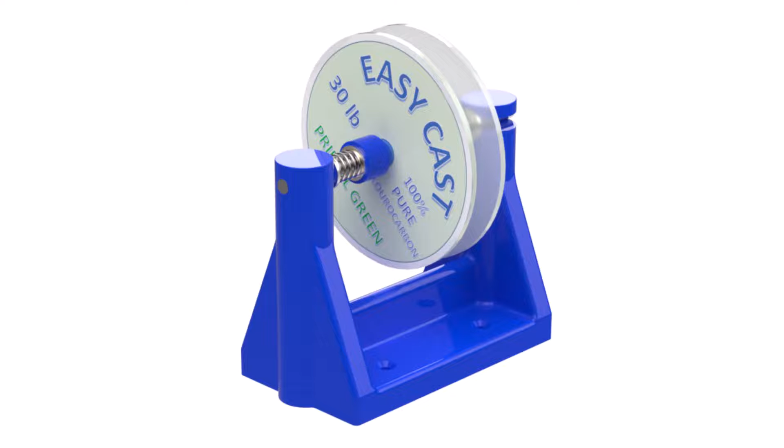This video presents a project that you can use to hone your SOLIDWORKS skills and is easy to make if you have a basic 3D printer.

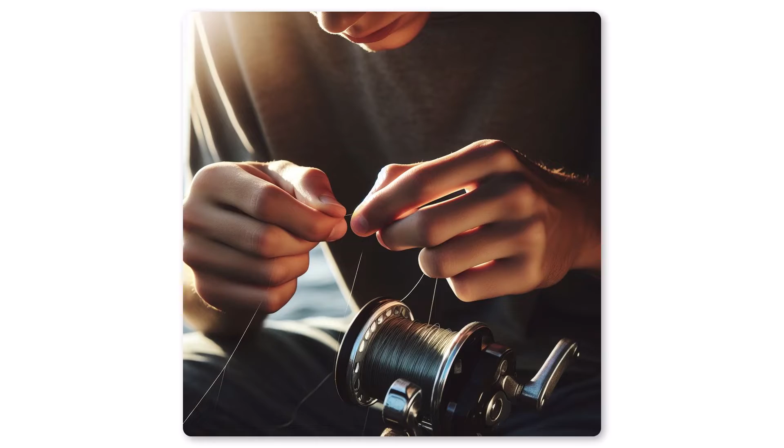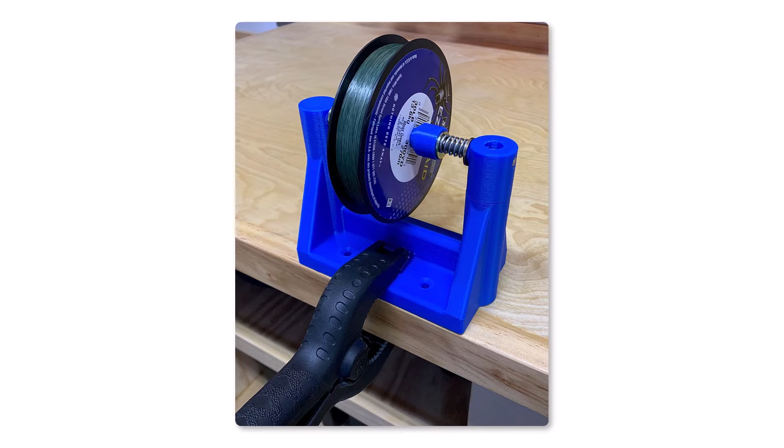I was getting ready for this spring season of fishing and needed to replace the line on my reels. Rather than asking someone to hold the new spool or propping it up with a makeshift error-prone system, it occurred to me that I needed a more reliable method to help hold the new spool. So I fired up SOLIDWORKS and came up with a handy design and printed it on my 3D printer.

The key aspects of this design that I will focus on are design intent, features, exporting solid bodies, hardware, assembly, and 3D printing. Let's get started.

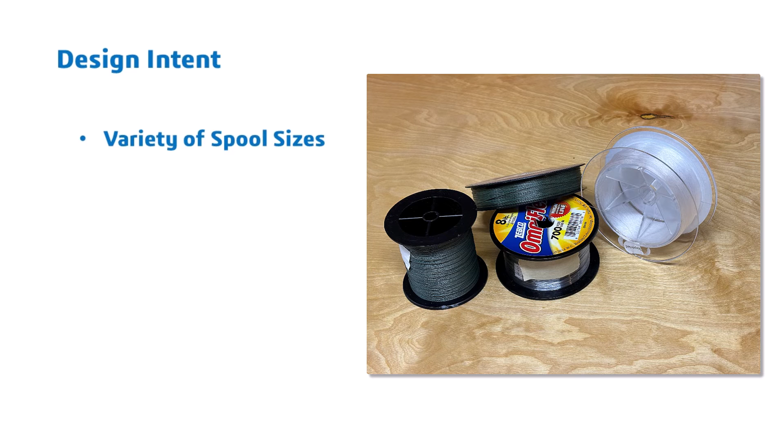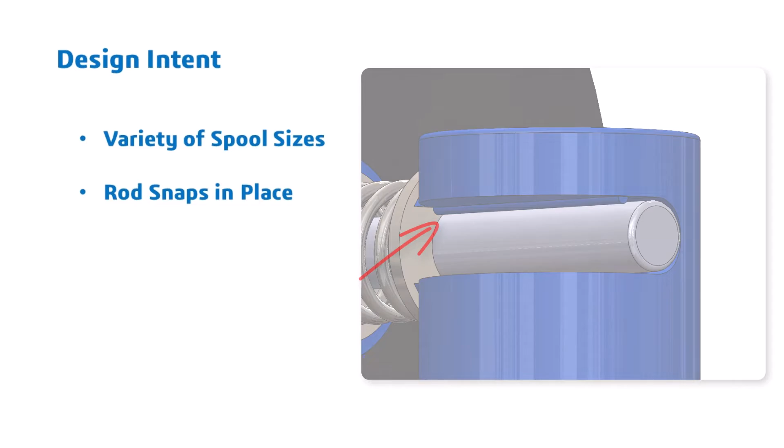I designed the Fishing Line Spooler to handle most of the standard size spools available at the local tackle shop. Changing the spools needed to be quick and easy. The rod needed to snap in place. The hardware is standard and readily available. The design needed to be able to handle the variety of spool sizes, yet only require one size spring.

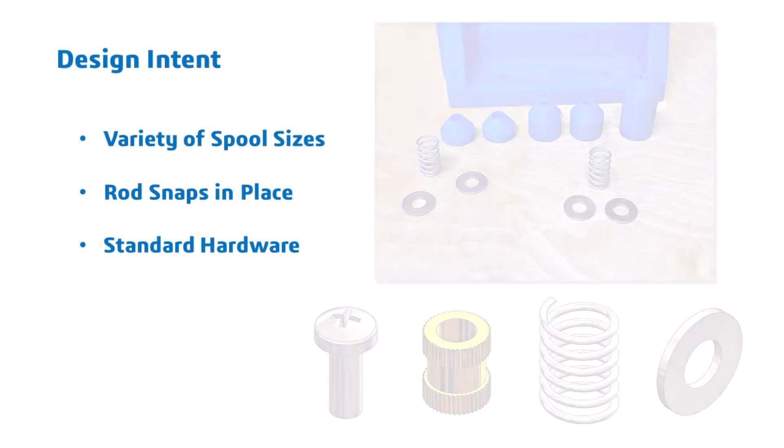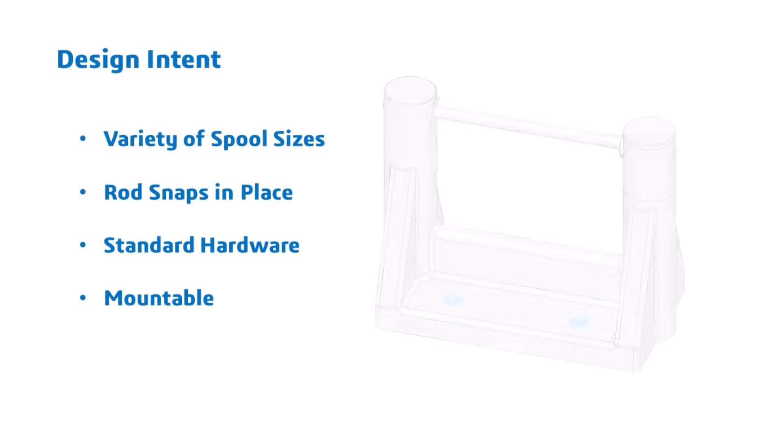The springs hold tension on the spools, preventing the line from running away and creating a tangled mess during the spooling process. The device should be able to be mounted to a bench, wall, under a cabinet, or simply clamped to a bench or table using a spring clamp. With the exception of the purchased parts, the main components are suitable for 3D printing with minimal waste.

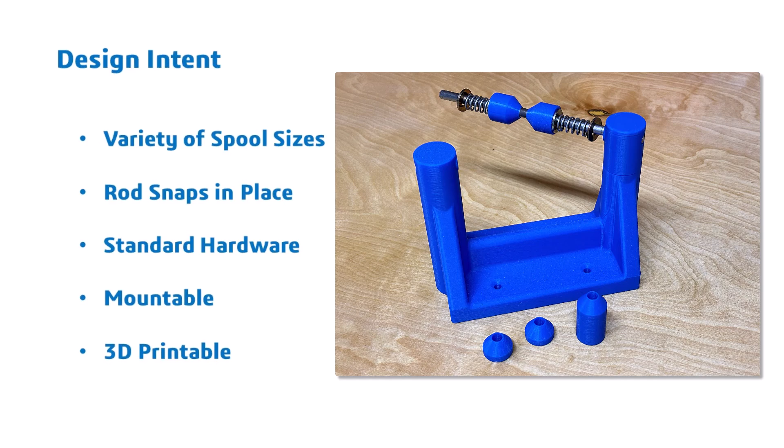I used multi-body part techniques to design the main body. This resulted in 4 parts. The swivel, body, and cap are all 3D printed. The 4th body is a representation of the rod. By creating it here rather than in a part of its own, I can take advantage of SOLIDWORKS parametric capabilities, ensuring that I have an accurate length of the rod.

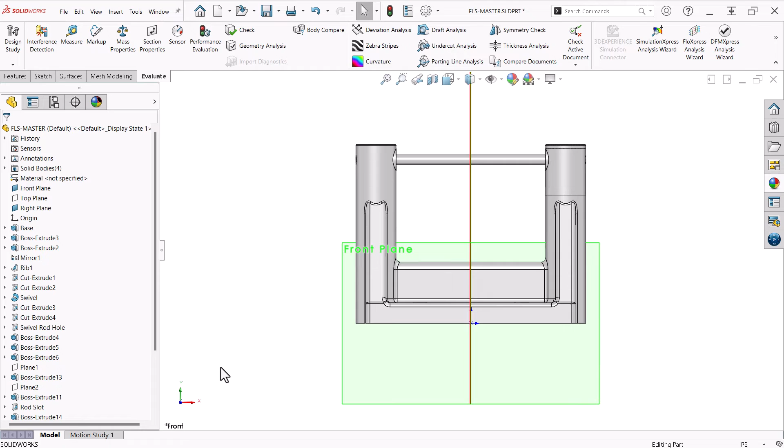The first thing I'd like to point out is that this model is symmetrical. As such, I want to take advantage of that and make sure I have the origin in the middle of the part. This way I can leverage the default planes. I'll just hide these for now to make things easier to see.

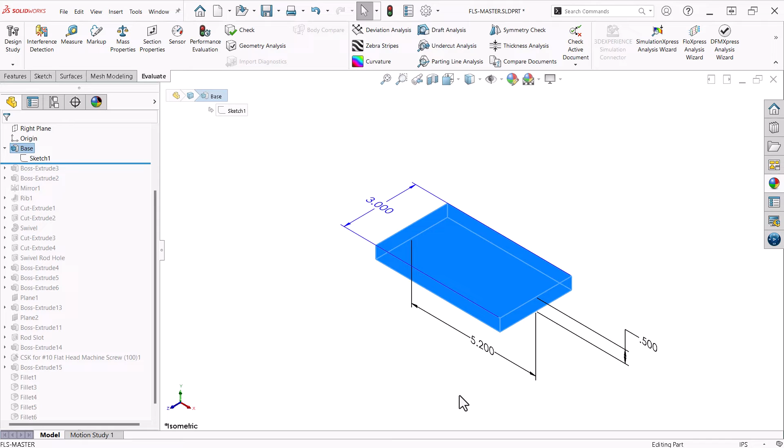The first feature is the base, and is oriented so it sits on the top plane, centered at the origin. For the upright, I place the sketch on the right face of the base feature and extrude the profile a ½ inch, followed by a 1-inch circle extruded 3½ inch up from the bottom. Using the right plane, I mirror these 2 features to the other side.

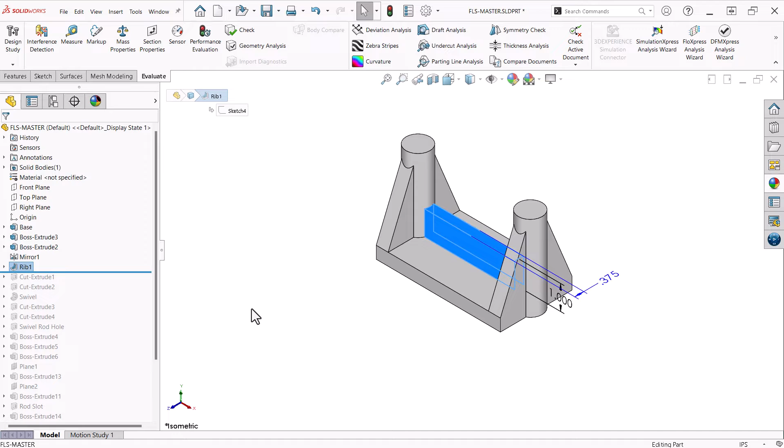For the rib, I put a sketch on the front plane with a single line and use that to create the rib. I created 2 extrude cuts to accommodate the swivel. The first is an offset circle on the top of the upright, extruded down 3/8 of an inch, followed by a hole for the threaded brass insert. The brass inserts that I buy are metric, so I make the hole the diameter of the insert at a depth that is a little deeper than the insert would go.

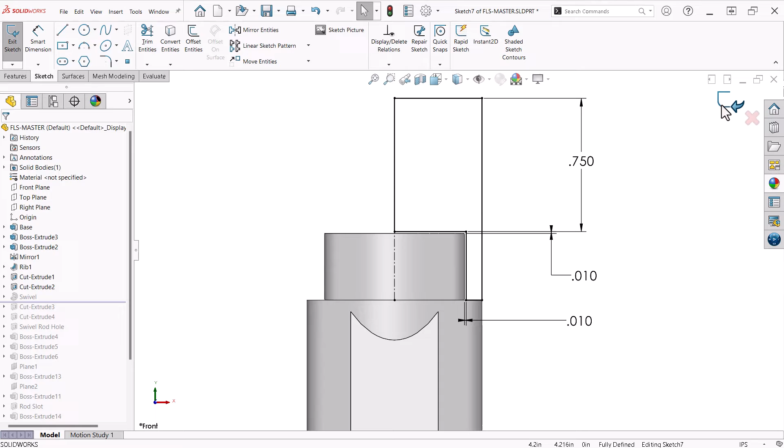I want the swivel to rotate freely, so I use small offsets in the sketch profile. Notice there are only 3 dimensions in the sketch. These are the critical dimensions of the swivel component. The rest of the sketch is fully defined with sketch relations. I then use this profile for a revolve feature and make sure I uncheck Merge Result to create a separate body.

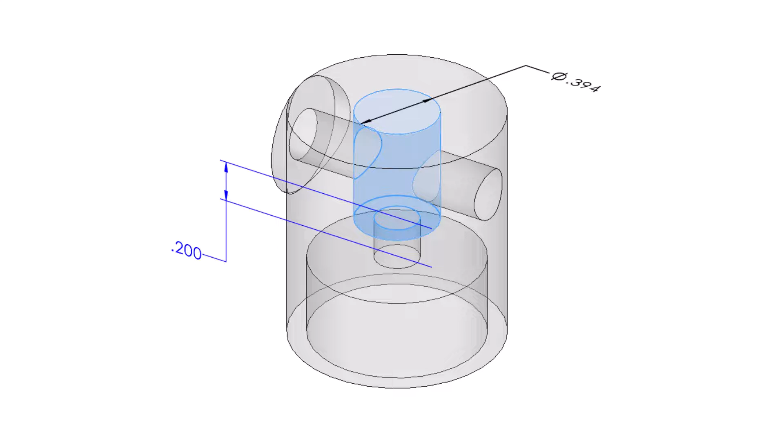The next 3 features are the cuts to accommodate the screw and rod, based on the design intent just mentioned. The first hole needs to have enough clearance for the diameter of the screw head and be high enough above the top of the upright to accommodate the length of the screw. The second hole is a clearance hole for the screw itself, and the third hole provides the necessary clearance for the rod to clear the top of the screw head.

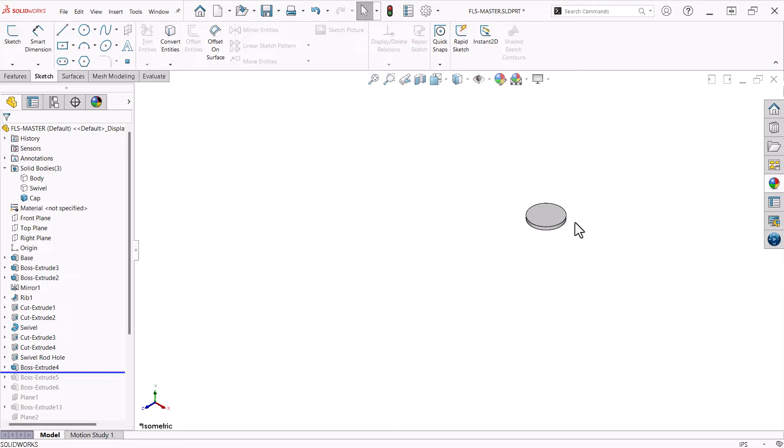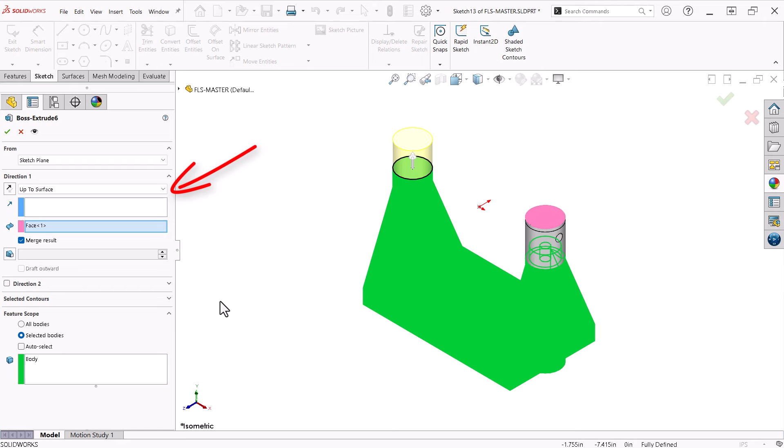To finish off the right side, I made a cap that will be glued in place with epoxy after assembly for a clean look of the design. The cap is a separate body with an extruded post on the bottom to fit into the hole. I used a slight draft which provides a little room for the epoxy. Once the right side is completed, I simply extrude a circle on the top face of the left side up to the top surface of the cap as an end condition. This makes both sides the same height when completed.

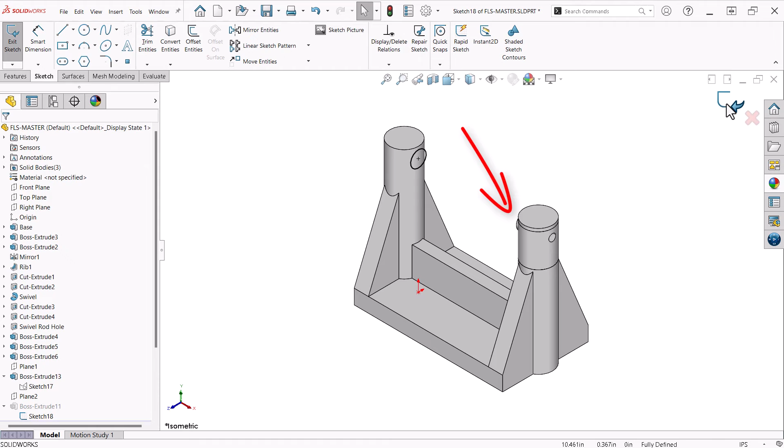I need to have a flat face on each of the uprights for washers to rest on. I accomplish this by inserting a plane that is parallel to the right plane and tangent to the upright. For the right side, I place a sketch on the new plane and using convert entities and relations, extrude up to the surface of the swivel body. I repeat the process for the other side. The circle is a converted entity created from the corresponding feature that was just created on the right side, and again, extruded up to the surface of the upright.

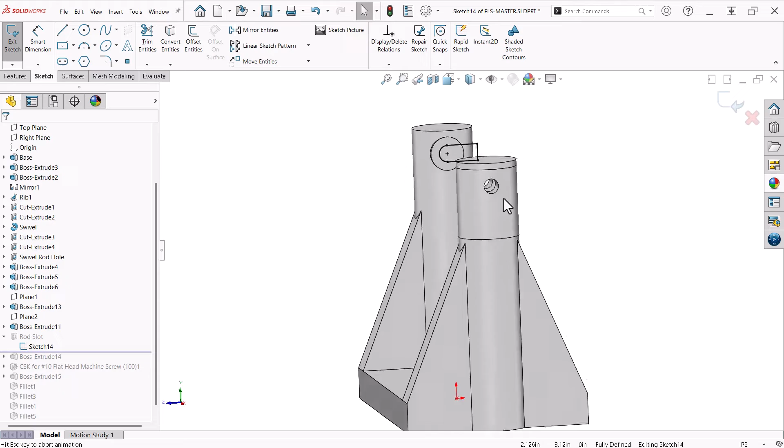On the left side, I need a slot for the rod to snap into. I make it slightly larger than the rod diameter for clearance. Notice there is only one dimension. This is the critical dimension. The rest of the sketch is defined using relations to surrounding geometry. This takes full advantage of SOLIDWORKS parametric capabilities.

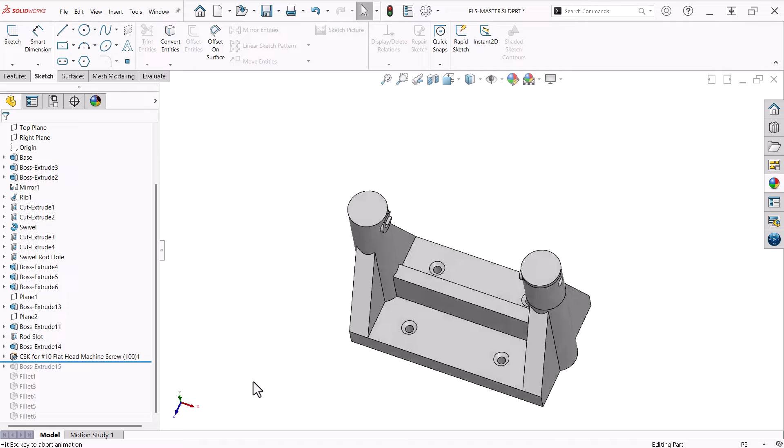The next feature is a small bump on the underside of the slot for the rod to snap into place securely. When I use this device, I simply use a clamp to hold it in place at my workbench or kitchen table. But I also felt it would be good to be able to mount it to a bench, a wall, or even under a cupboard. I used Hole Wizard to put a pattern of countersunk holes for this purpose.

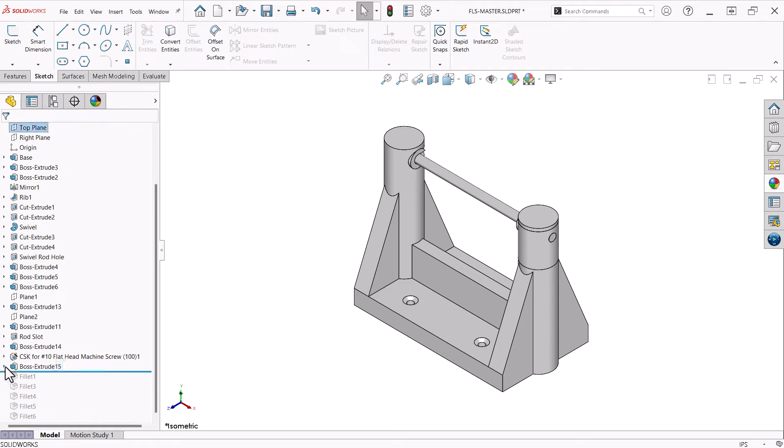To create the rod, I placed a sketch on the right plane with a circle the same diameter of the rod, positioned with a coincident relationship to the center of the hole in the swivel, and a mid-plane extrusion the appropriate length. Again, I uncheck Merge Result to create a separate body. Even though I make the rod from a piece of purchased steel rod cut to length, creating it here in the model helps me to visualize my design.

The last thing I do is add some fillets to finish off the design. As these are not critical to the design, use whatever sizes you feel are appropriate.

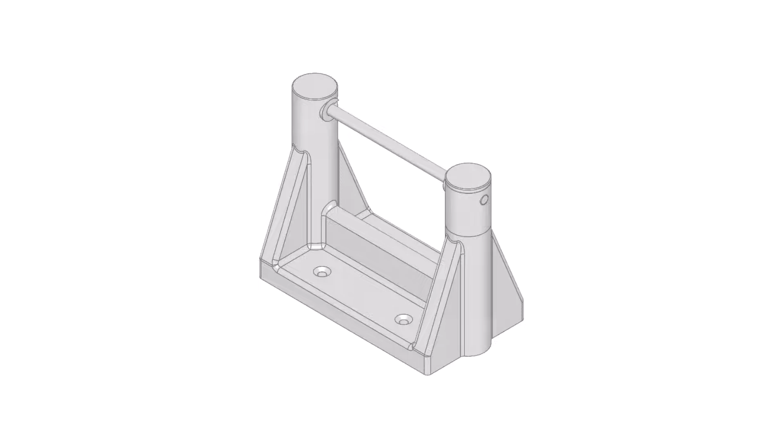Now that the components are finished, I want to save the individual bodies to separate files and save them to a format that my 3D printer will understand, an STL file. For this, I will utilize the Insert into New Part command. Using this method will allow me to create an assembly with the components and then generate the STL files.

I'll expand the Solid Bodies folder, right-click a body and choose Insert into New Part from the context menu. Next to Title, I click the button to browse, name, and save the file. Then click the green check to initialize the command. This creates the part file and opens it.

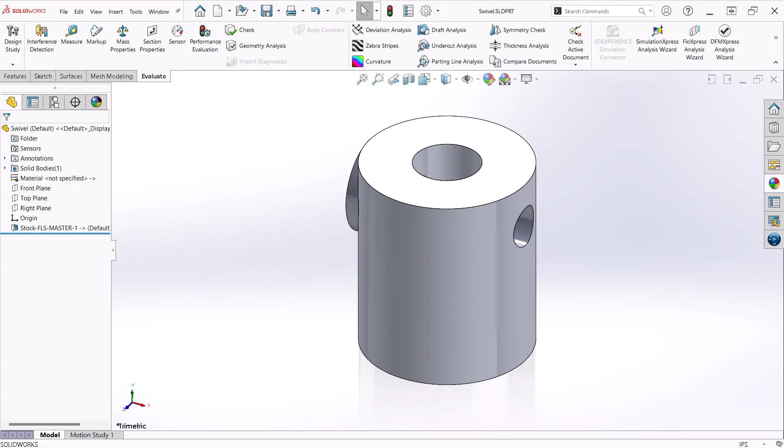Notice the FeatureManager design tree has one feature called Stock with the file name of the part file it is derived from. With this file open, I'll choose Save As and select STL for the type and click Save and then Yes to dismiss the message. Now I will return to the master part and do the same thing with all the other bodies.

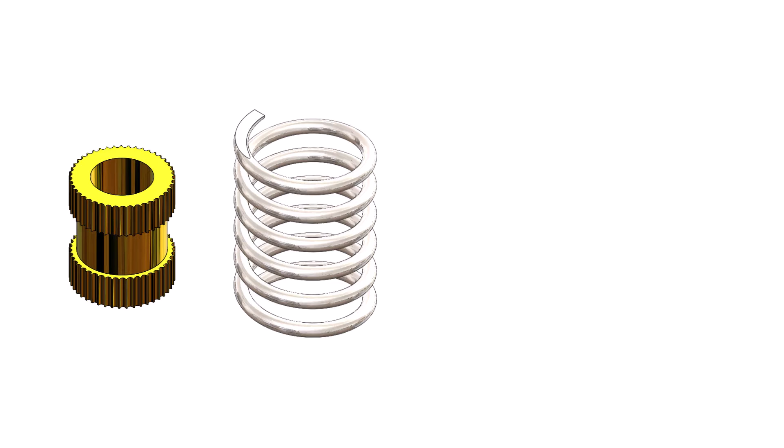Part of the design process is to bring it all together in the context of an assembly, to make sure the design will work properly. For this, I created a representation of the brass insert, a spring, and the washers. I used a screw from the Toolbox in SOLIDWORKS. I found a suitable spring at a local hardware store and with my calipers measured the size to be 1/2 inch by 3/4 inch long.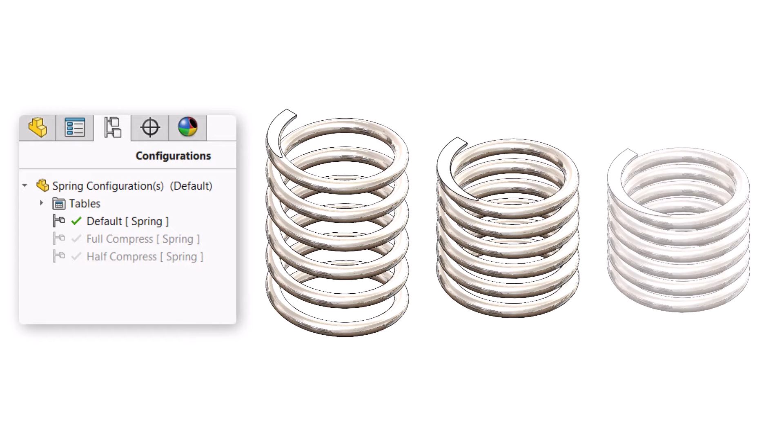With such a small spring, I needed to make spacers to make up the difference to accommodate the different size spools. I wanted to be able to see in the model what the spring will look like under different compressions. So I created the spring with 3 configurations: default or uncompressed, half compressed, and fully compressed. The spacers were also created as a single file with 3 possible configurations, using a simple revolved profile. These were also 3D printed.

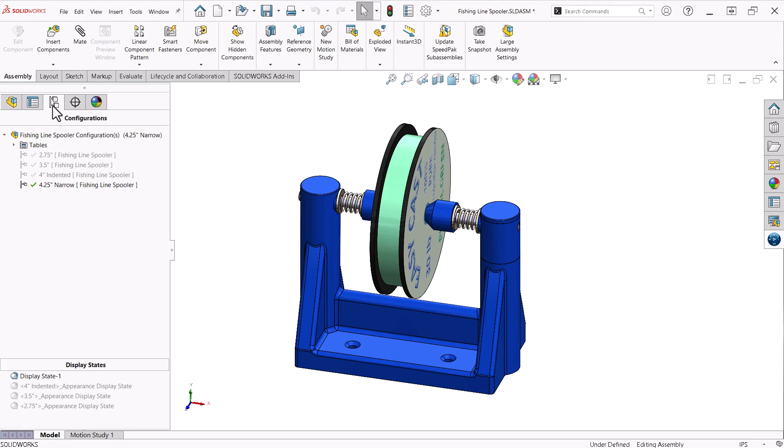Bringing all the components together in an assembly allows me to test the form, fit, and function of the components. In addition to creating the spring and spacers with configurations, I also created a representation of the spools with configurations of their own of each of the 4 possible sizes. Because of this, I'm able to create configurations in the assembly file to represent the 4 sizes as well.

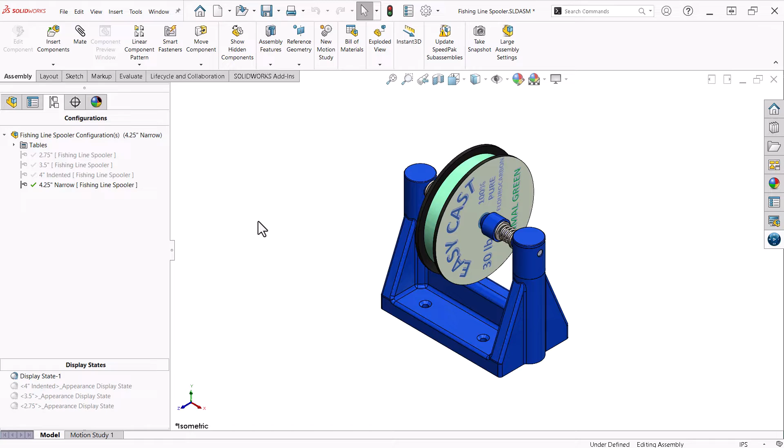This design has a few parts and very little need for support material. I printed the spacers and cap in one print. The cap is printed upside down to accommodate the post. The body has one small area that creates an overhang. My slicer has the ability to create generative organic shapes for support and is the best option in this case.

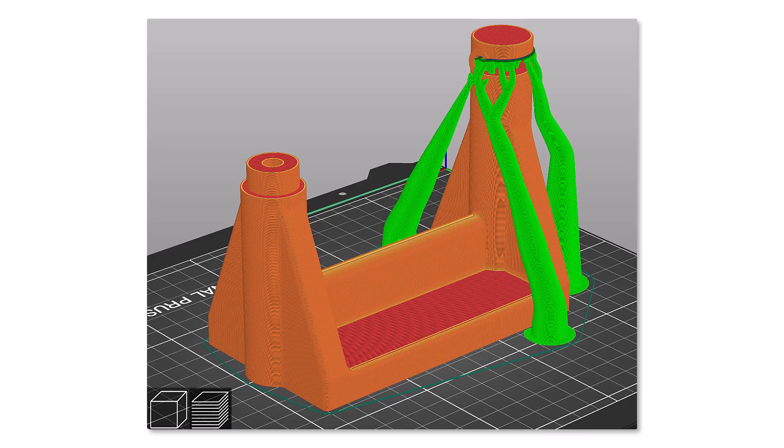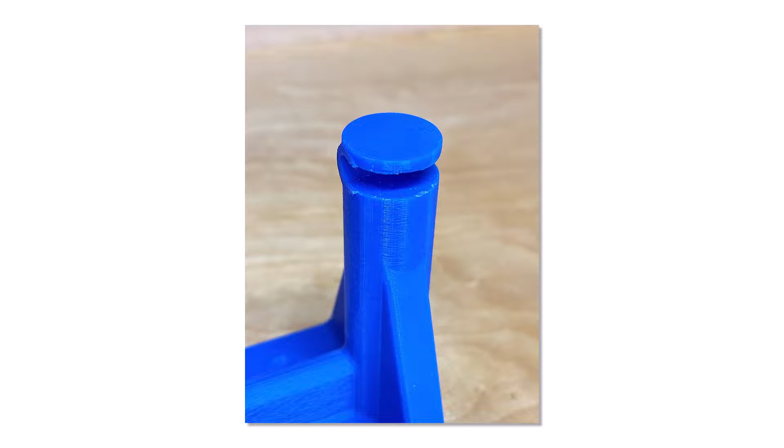If I were to use the default option for supporting this area, support material would be attached to the part and is more difficult to remove from the ledge. Using the organic support shapes eliminates the need for scraping support material from the ledge. For the swivel, I orient it upside down on the printer and use the organic support options as well, resulting in a nice clean part.

I purchased a standard 3-foot length of 1/4-inch steel rod from my local supply store, cut it to length with my angle grinder and a cutoff blade, beveled the ends, and cleaned it up with steel wool.

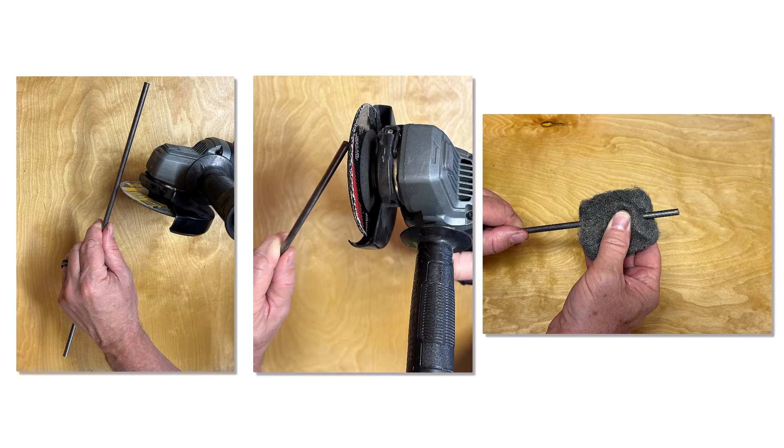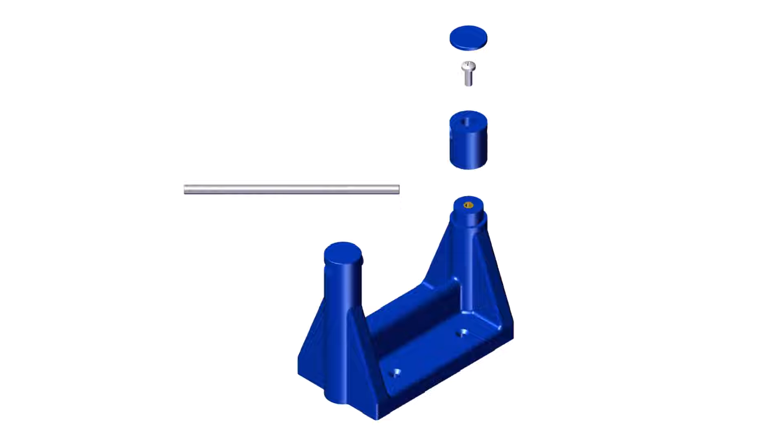To assemble the physical unit, the threaded brass insert is tapped into the body with a small hammer. The swivel is attached with the screw, then the rod is tapped into the swivel with a small hammer. The cap is glued in place with epoxy. All that is left is to add the washers, springs, appropriate spacers, and a spool of fishing line.

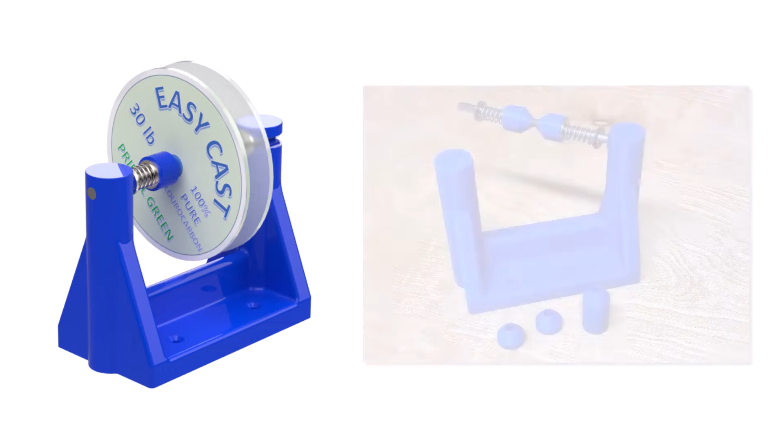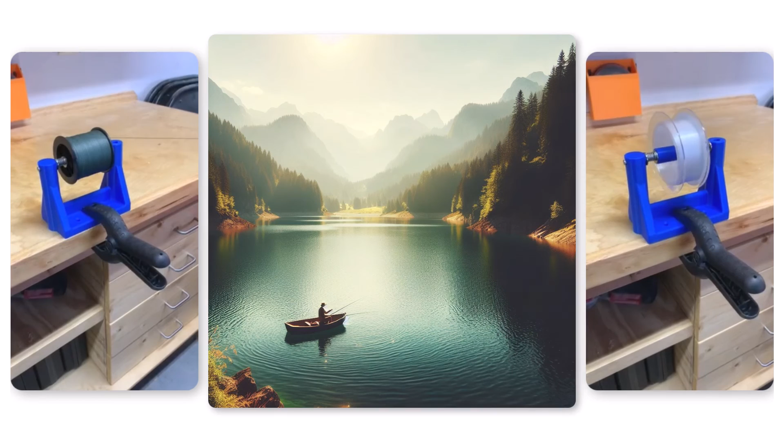This is a great little project that provides a solution to an everyday problem very well. It is also an excellent exercise of using multi-body part design in SOLIDWORKS, configurations in parts and assemblies, and representing purchased parts and using them to test form, fit, and function within the context of an assembly. So fire up SOLIDWORKS and design a reliable fishing line spooler yourself and get out on the lake.